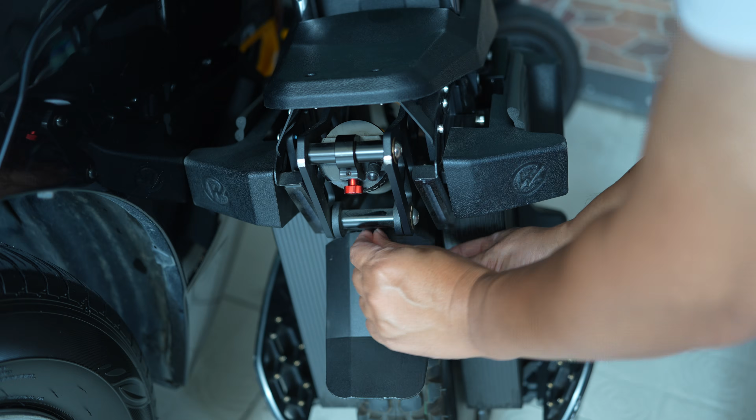This object is very thin. See, it's only 1.5 millimeters thick. So in this video I won't be using CAD or Blender or anything to clean up and adjust the geometry of this object. I will just scan and print.

To be able to print the object, you need a solid, which means that you need to scan front and back so it has a solid mass inside and a closed geometry, so there should be no opening on the sides whatsoever. I will scan the flat front and then flip it over and scan the flat back. There is an overlapping area, which is the side wall here. This is the only overlapping area for the front and the back.

So these two walls will be used for overlapping because they can be seen in both the back side and the front side. I will put some markers onto this side. These markers will be used for reference when I merge the front and the back together. I will click on these markers because the new Creality Scan software has a new feature called merge with markers. So if I have markers on the object, I can use them for referencing when merging. Okay, I put 2 here and 2 here, so there will be 4 pairs of references when merging.

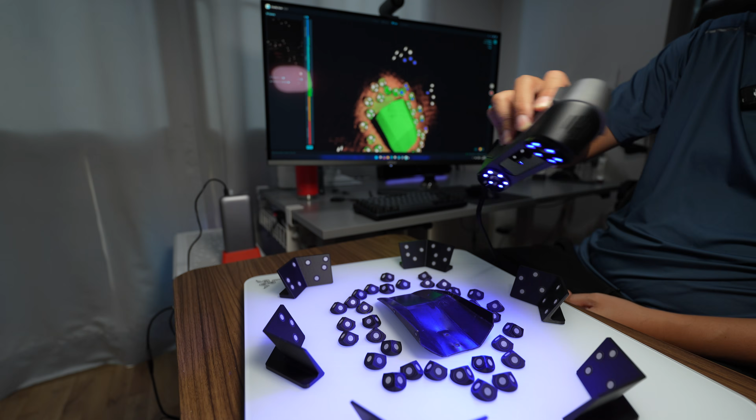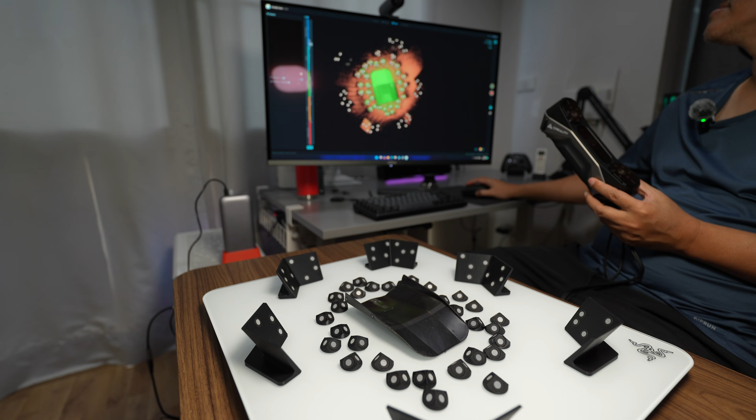Okay, that will be all. Let's stop the scan. Okay, let's do the merging. I remove the marker and resolution set to 0.15.

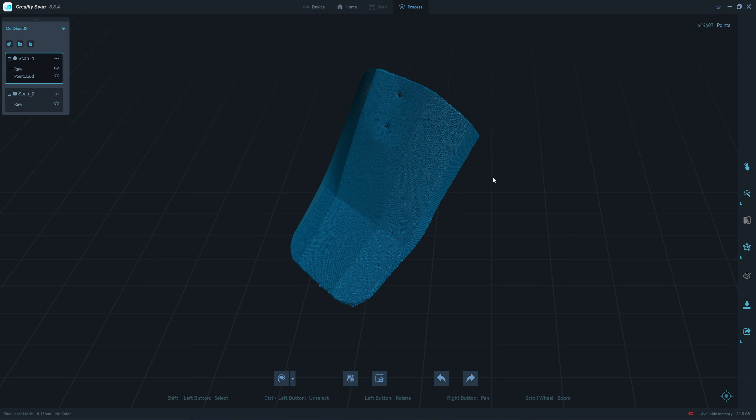So this object is a bit crooked. I should scan this when it was new. Okay, let's move to the back side. 0.15. That's it. A bit more.

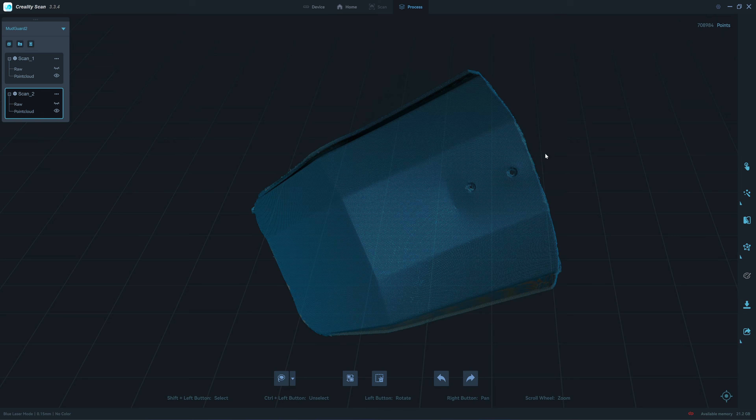Okay, merge. I'll do manual merging because you can't do auto merging with this part, it's too thin. And there is a new function called marker merging. Click on this one and then click front and bottom. You get two windows to pair it. If you move close enough, you see the marker.

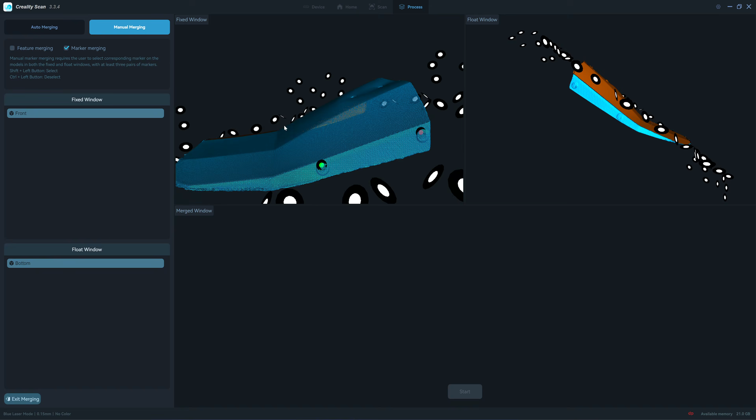Click on it. One first pair, 2, 3, and 4. Yeah, it looks nice. Click yes, exit. Next you need to turn this point cloud into mesh and close all the openings.

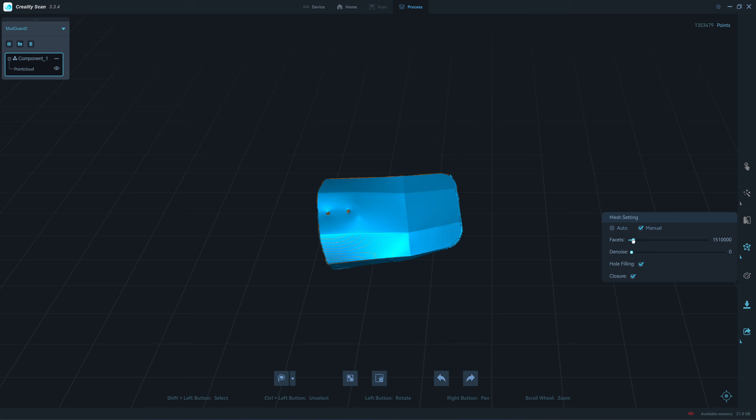I click on closure, hole filling, and we have 1.3 million points, so I choose around 1.5 million faces. Let's mesh it. Okay, the hole looks clean. The model is closed. So this is a solid model, you can print it. There shouldn't be any issue.

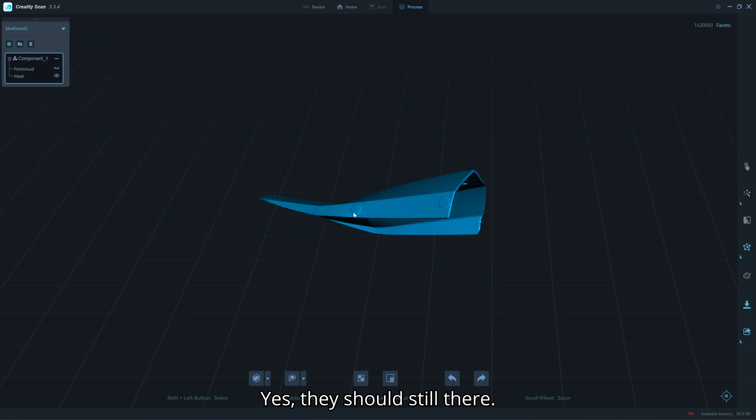On the edge here, there is something sticking out because the actual one also has it. And the marker is still there, so doesn't matter. Okay, I send this one for printing. They have this function, Creality Print. I fire up Creality Print and import the model.

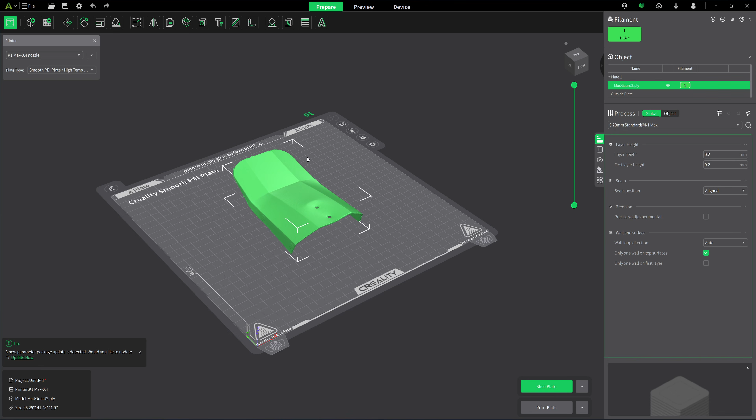Okay, I choose K1 Max. I have K1 Max and K1C. I have filament left on the K1 Max, so I use this one. I print with PLA. Let's face it this direction.

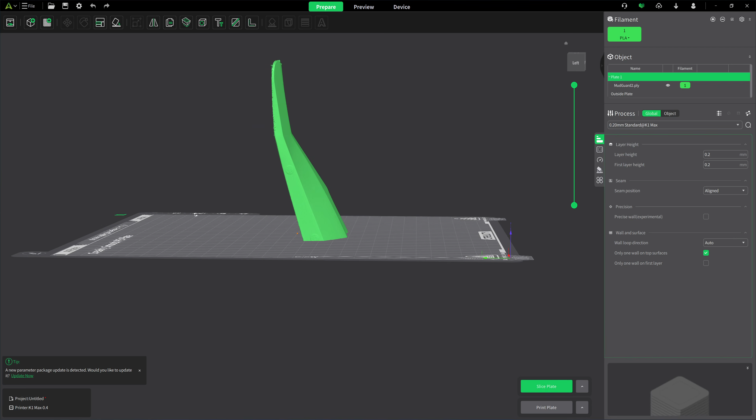So you see here that it's not flat, so you need to move it down a bit. So it will be a little bit shorter, 1-2 millimeters, so that it can stand on the print bed. And I shouldn't need any support. Brim object gap I set to 0 because I don't want it to fall down.

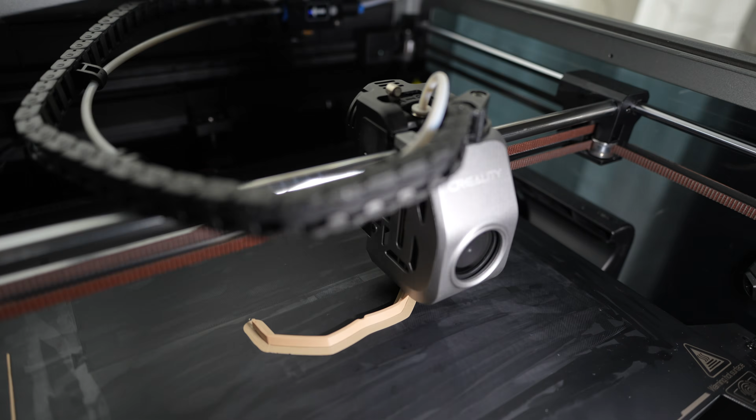Slice it. Okay, let's see. Okay, now the brim and the wall line is connected. I think I'll send it to the printer. It's 43 minutes printing.

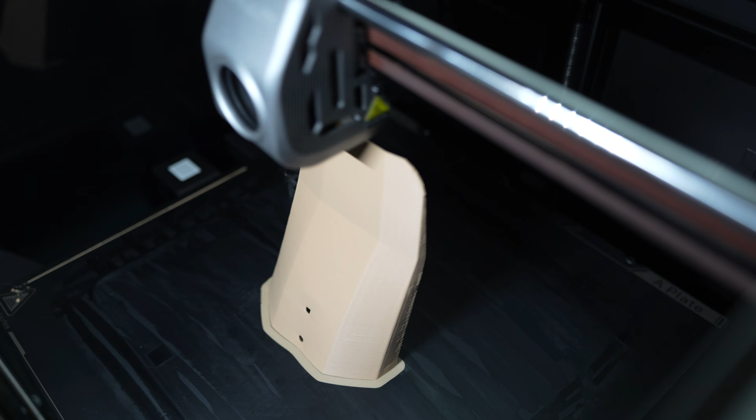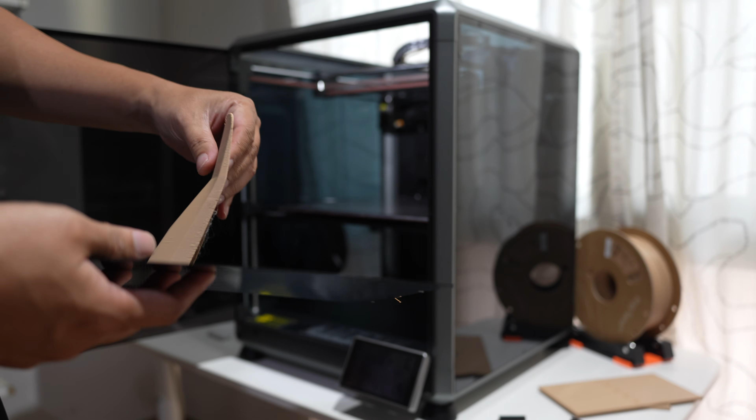The hole here is too small. It's supposed to be able to fit an M4 screw, but it's a little too tight. I drill a hole here with a 4mm drill bit. Here is the original part, and this is the clone. It looks identical.

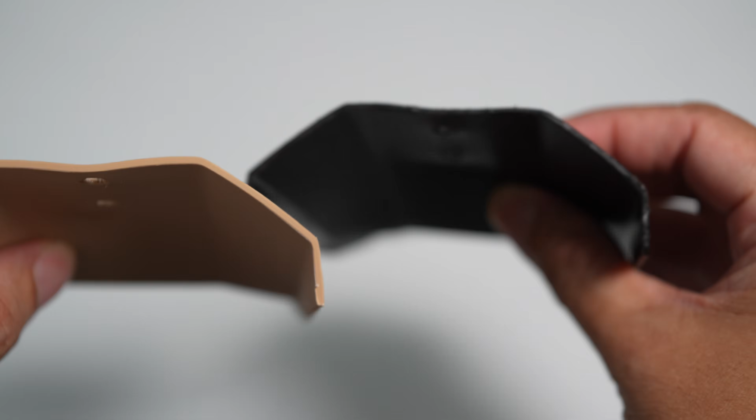See here on the sides. Imperfection from printing on the original copy. Also I have this too. And on this side, and here you have this too. The original copy is scratched up.

Here is crooked. This one is kind of flex. This one is a little less flex than the original copy. I would say, yeah, you can just scan and print the part without doing any post-processing or needing to do a CAD drawing. I think this one is usable.

Problem is that I scanned the damaged copy, so you see here it's crooked, it's bent up. It's also bent up. Yeah, if you can do CAD modeling, I reverse it in CAD and make this mudguard and I adjust something like the thickness.

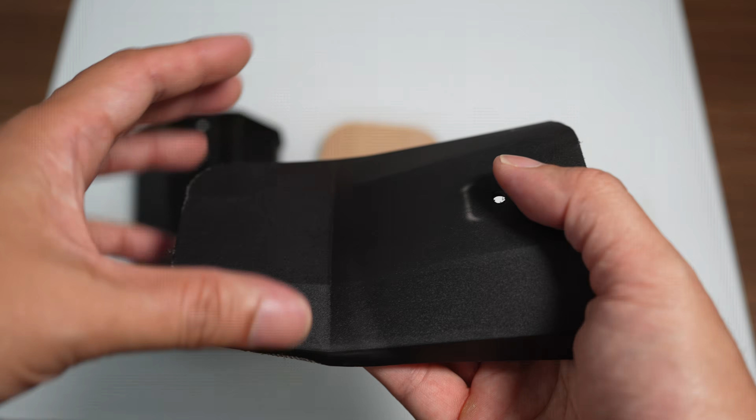I think the original copy is made by using a flat plastic sheet and doing thermoforming. They place the flat plastic sheet into the mold and form this piece, and then they sell it for $22 US, which is very expensive for a flimsy plastic.